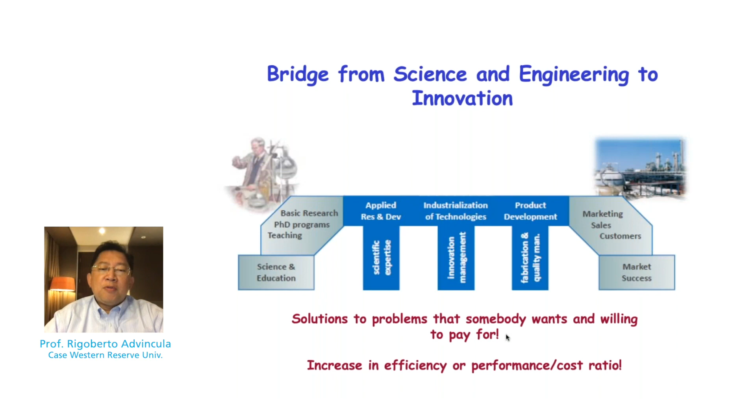On the other hand, we love to work with industry. A number of companies in the past have funded our work, including companies related to the oil and gas industries, oilfield service companies and proppant companies, which I will highlight today, the work we do with propping agents for hydraulic fracturing. In a way, what we do in a university is take the best of the basic platform of research we develop and translate it to the market. We do this with applied chemistry and applied materials, and working with companies, we're able to solve problems where we have a very good performance cost ratio. In other words, we do something that will improve efficiency or performance cost ratio, and of course, somebody will be willing to pay the cost.

Now, in the area of petroleum science and engineering, we started in 2014 PetroCase, which stands for Polymers for Energy and Transformative Research in Oil and Gas. We work on materials that can be very useful for extreme conditions: proppants for unconventional oil and gas, coatings that can withstand high temperature and high pressure, as well as nano additives for improving fluid behavior and flow in various fluids used for the upstream industry.

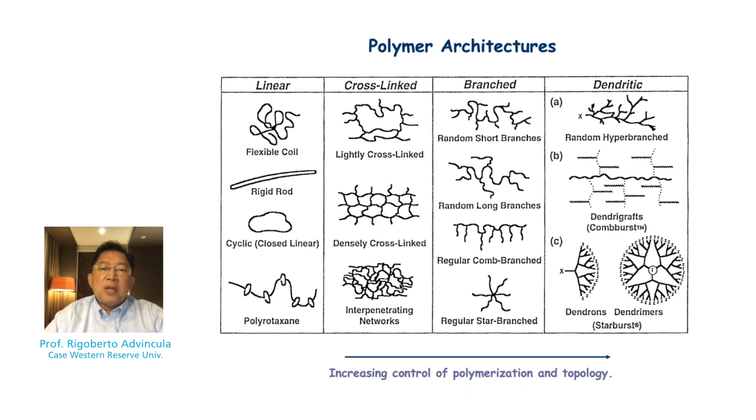So the way we do this is we work with polymers. Polymers are large molecules with different microstructures, from linear to cross-linked structures, to random, hyperbranched, and of course a lot of interest these days is in controlling their composition, microstructure, or their structure-property relationships. In a way, you want to use these polymers to control fluid behavior.

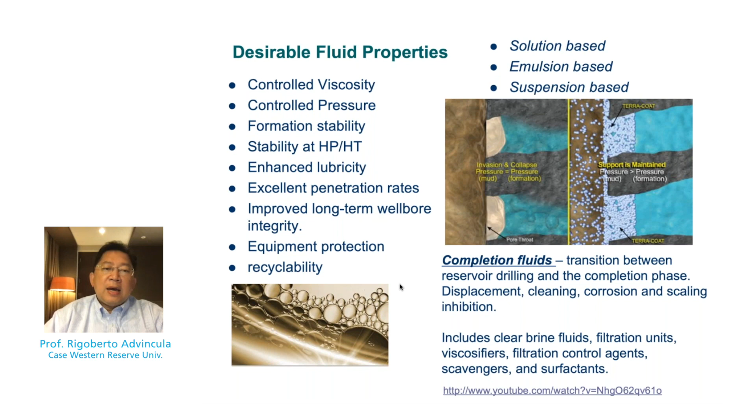Fluid behavior, whether it's solution, emulsion, or suspension based, means that polymers can control viscosity as an additive, and protect the formation as an additive for controlling degradation and acid stimulation. It can be used to stabilize the formation during matrix acidization type procedures. In the upstream industry, we work with drilling fluids, completion fluids, and workover fluids, which have importance in improving productivity and wellbore conditions or integrity.

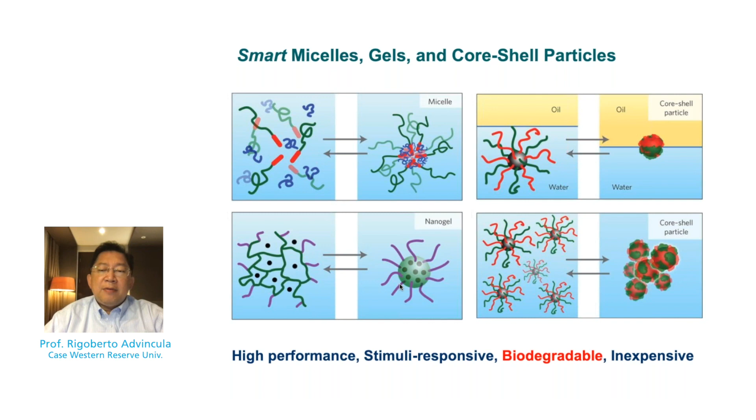Now, polymers are not only solubilized, they can be micellized or contribute to cross-linked gel formation. They're able to phase separate between the oil and water phase, or they can be involved in swelling and contraction based on controlled pressure and temperature. In other words, these are smart materials, able, based on the correct structure property relationship, to have applicable stimuli responsiveness that allows them to be used smartly for controlling fluid behavior.

Here I outline some of the more recent research work we do with the oil and gas industry, from working with viscoelastic surfactants and other well stimulation fluids, resin-coated proppants for hydraulic fracturing, which I'll emphasize today. We do 3D printing methods and projects, including nanocomposites, use of continuous flow polymerization methods to improve efficiency in polymerization of additives useful for the oil and gas industry, continuous and circulation testing under pressure and temperature. We do a lot of work on anti-corrosion coatings, emphasizing superhydrophobic coatings for oil and water separators. Lastly, we're interested in the application of nanomaterials like nanocellulose, graphene, and other nanostructuring methods for oil field chemical additives.

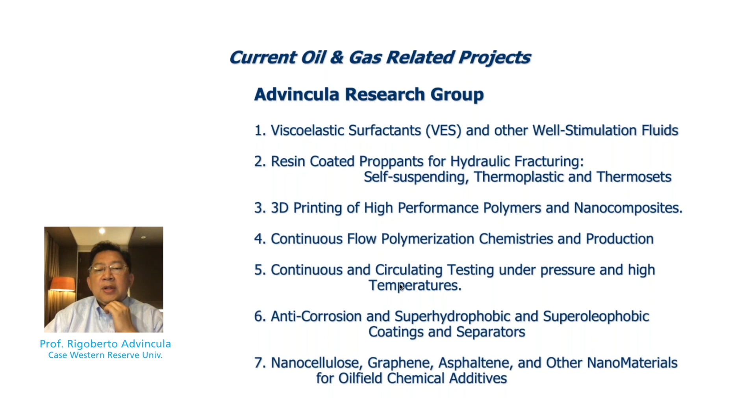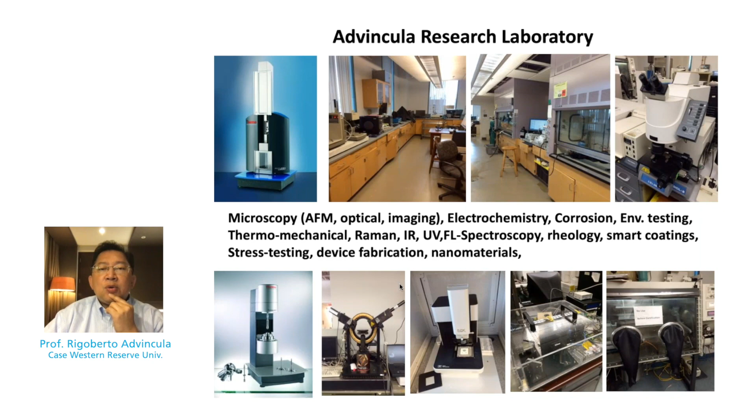Okay, here's a view of our laboratory. I just want you to see how it looks like. We are fully equipped for both synthesis and characterization. In particular, we're able to do a lot of surface analysis, including atomic force microscopy, which we do on coatings and also proppants. On the other hand, we're fully equipped for working with projects related to core flooding, pressurized flow, rheology of fluids, fluid loss measurements, and investigation of phenomena that could be related to downhole conditions.

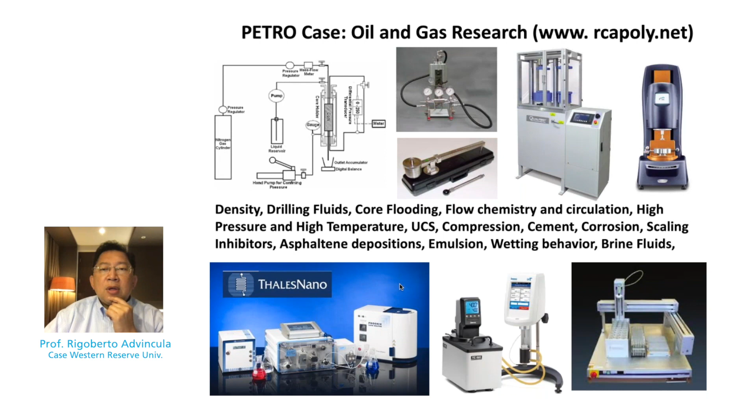In the oil and gas production and distribution, one deals with upstream all the way to downstream. There are demands or problems that can result in low efficiencies or low production. That is why the emphasis on low cost but high productivity or high efficiency is always an attractive option. In fact, with proppants, which we will talk more about today, there is a drive to understand the cost of using a lot of proppants versus using smarter proppants, even though at a higher cost, but can result in higher production efficiencies.

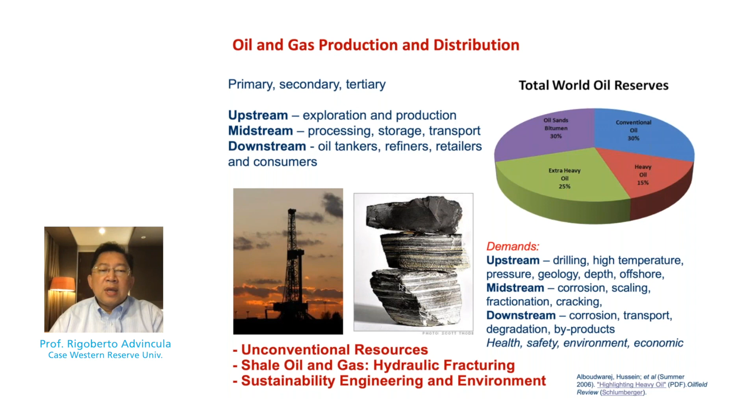Such is the case for shale oil and gas. This has been the key towards oil and energy independence here in North America, in the United States in particular. So science and technology is trying to keep up always with regards to improving efficiency and problem solving.

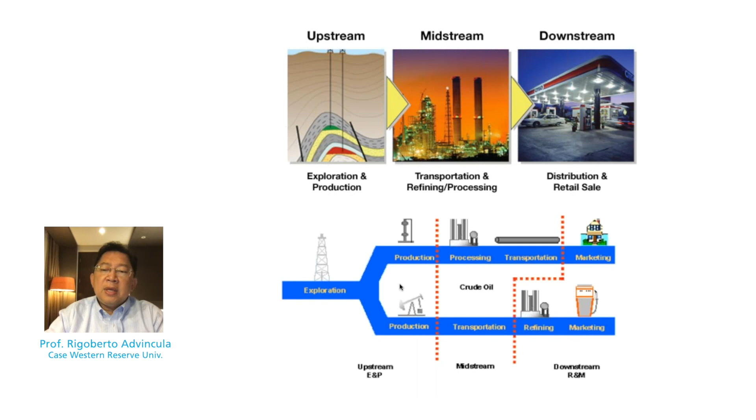Now, as you can see here, we can divide the petroleum industry into the upstream, midstream, and downstream. I apologize if this sounds simple for some of you who are experts there and who have been involved with the industry. I would like to use this as a segue also to address people who are very new to this field. Upstream regards oil exploration and production, which involves drilling and extraction. Midstream could be transportation and storage, all the way to the refining, and then of course downstream is refining all the way to the distribution. All this means that there are various supply chains and production demands that start all the way from the oil field, whether offshore or onshore.

Now, hydraulic fracturing is a game-changing technology that goes back, in fact, all the way 75 years ago. What it is, is that it allows you to extract unconventional oil and gas, or difficult to extract resources such as shale oil and gas, by employing high pressure pumping of various fluids, primarily aqueous fluids that has been viscosified with a polymer.

Now, a key ingredient to hydraulic fracturing is not only the additives, but the use of propping agents or proppants. This has largely been in the realm of sand or minerals, but in the past and even now, there's a lot of interest and uses of ceramics, bauxite, and other types of resources, including walnut shells and, of course, resin-coated sands, which emphasizes the work we are doing with polymer coatings for proppants.

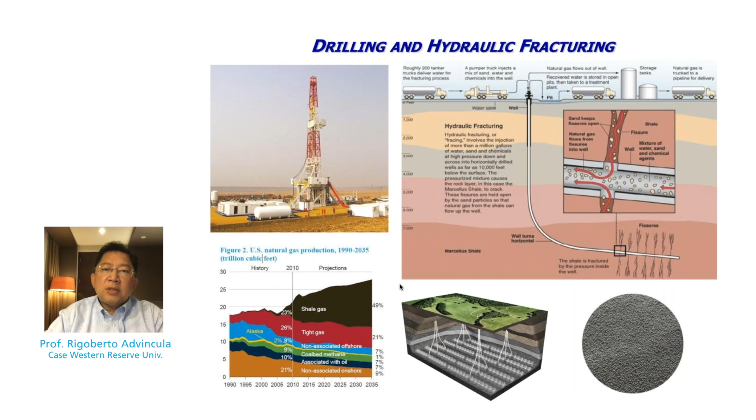So just to emphasize that whether you're dealing with subsea engineering, drilling, transport, storage, or refinery problems, it's always a catch-up game in that the energy or efficiency of energy extraction increases or improves as the technology catches up.

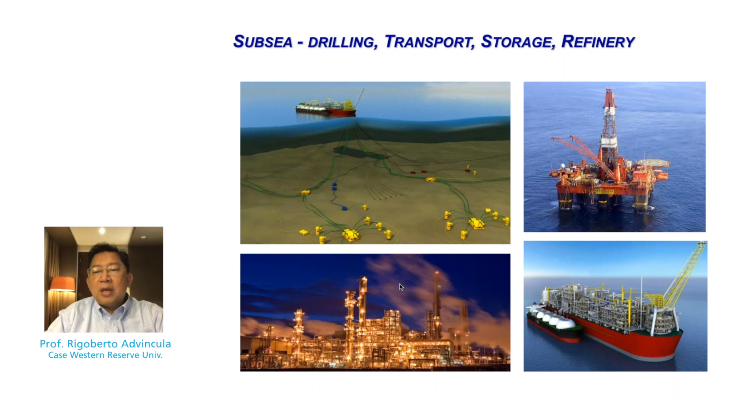In fact, 10 years ago, people were talking about peak oil, thinking we had extracted all the oil and gas we could ever do, or that tertiary recovery would be very difficult until a lot of efficiencies were solved or perfected, even in hydraulic fracturing, which brought the cost of doing such procedures to a profitable price.

Of course, the price of oil and gas fluctuates, and in leaner times, cutting costs or conserving cash has always been a game. But remember that in this game, which goes up and down, technology is always a prime mover in all stages, from upstream all the way to downstream of the petroleum industry.

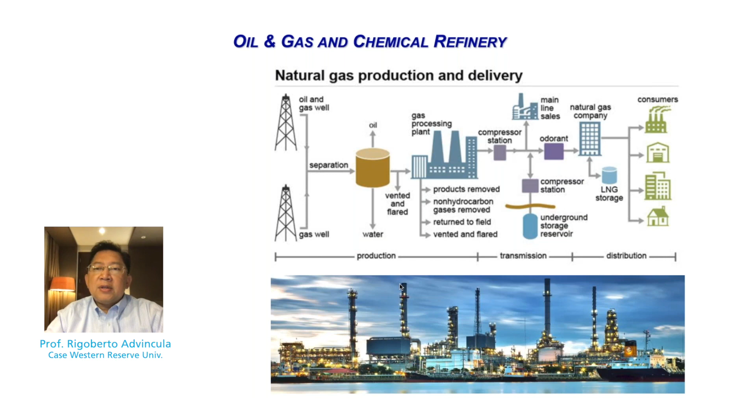So here is a simple chart showing how the oil and gas extracted from the field is separated into oil and produced water, and then goes to the gas processing plant, transported by pipes, and compressed. If it's transported as LNG, this is on the way to exporting, which is what the United States has become for the last 5 years. We are a net exporter of natural gas throughout the world.

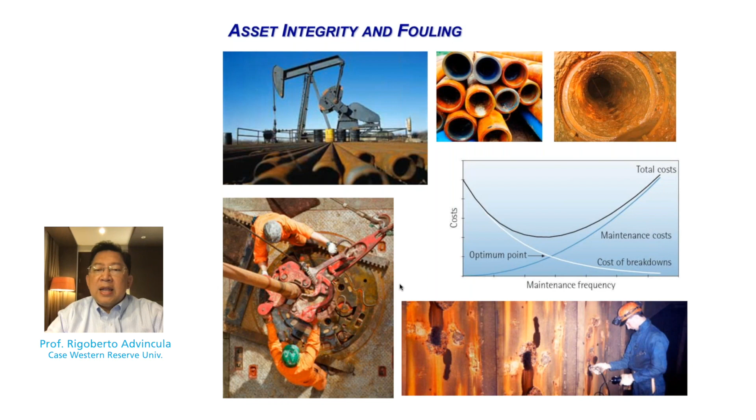And then, of course, one has to deal with fouling problems, which is present in a lot of extraction industries. That means that whatever we pump or use in all these pipes, whether the casings or the pipes that transport oil from the production field all the way to the refinery, there's always caution to add anti-scaling or anti-corrosion agents, or even use better alloys to prevent fouling.

And then lastly, catastrophic failure is something that the oil and gas industry is very careful to avoid and mitigate, at least by using the best practices in the industry.

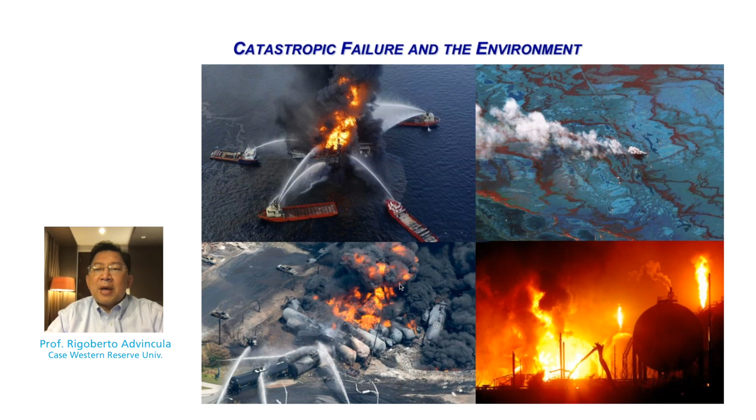So I hope this introduction has put a perspective on our interest in proppants and hydraulic fracturing. Before I focus more on proppants, a good introduction on hydraulic fracturing is needed.

In hydraulic fracturing, a fluid based on water, oil, or emulsion is pumped towards the formation, which we typically call tight, a shale formation with oil and gas resources. Together with directional or horizontal drilling, this has allowed the efficient placement of tubulars or annulars such that the formation, which has very high pay zones, can be reached by hydraulic fracturing. Typically, we're looking at about 10,000 to 20,000 feet.

Pressures are about the same, about 10,000 psi. Therefore, anything you pump means you have to pressurize or viscosify the fluid such that you can force the opening or fracturing of the shale and then eventually employ proppants.

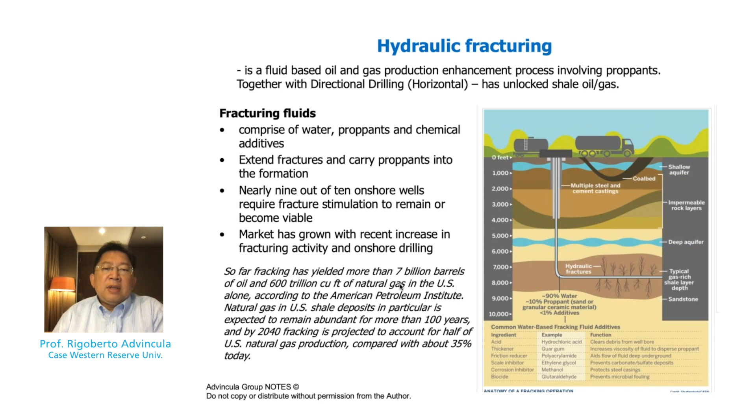Most fracturing fluids comprise water, chemical additives, and suspended proppants. The extended fractures are essentially opened or kept open by the deposition of proppants that are pumped together with the hydraulic fluid. A lot of these stimulation procedures are used to improve production efficiency. In other words, without this stimulation or completion procedure, these wells are unproductive. This means careful planning is needed to match the production cost with the improvement from the fracturing procedure.

As you can see here, the hydraulic fracturing fluid is basically a carrier that pumps the proppant as far as possible into the fracture. The fracture, which can be prepared by a perforating or isolated perforating method, is cracked or fractured open such that the fluid containing the proppant is dispersed as far as possible in the formation or fracture, so the proppant remains on that fracture and keeps it open. In a way, a proppant really is a tool that is employed during this procedure.

Now, a good question is, if this is a tool that remains on the fracture, shouldn't we be emphasizing the efficiency of the tool, or the proppant, to enable higher production? This is probably a good question to ask. Why is it that most hydraulic fracturing procedures have shorter lifetimes? In other words, within 1 to 2 or even 3 years, there's a high drop-off in production with most hydraulic fracturing procedures.

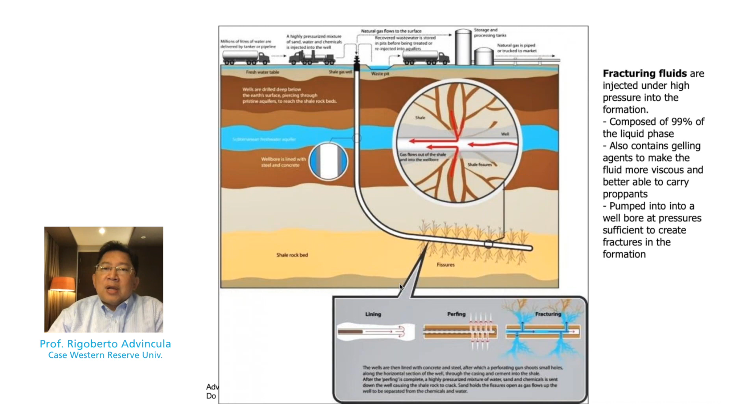A hydraulic fracturing fluid is mainly water in this case, although other emulsions or gases can be used. As a hydraulic fracturing fluid, it contains many things, including gelling agents, surfactants, cross-linkers, breakers, inhibitors, biocides, and so on. So it's a formulated fluid, and together with the viscosifier, one is able to carry the proppant together with this fluid onto the formation.

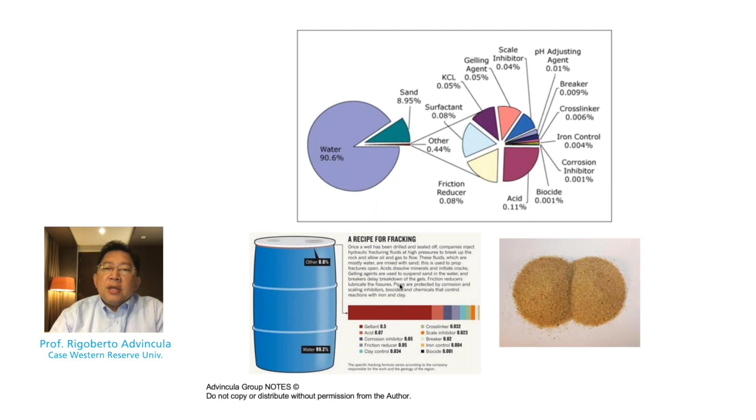A good fracturing fluid should be able to withstand various temperatures, pumping rates, or shear rates. Most commercial fracturing fluids are aqueous based, and they are jellified or even foamed. A typical jellifying or viscosifying agent is based on a polymer.

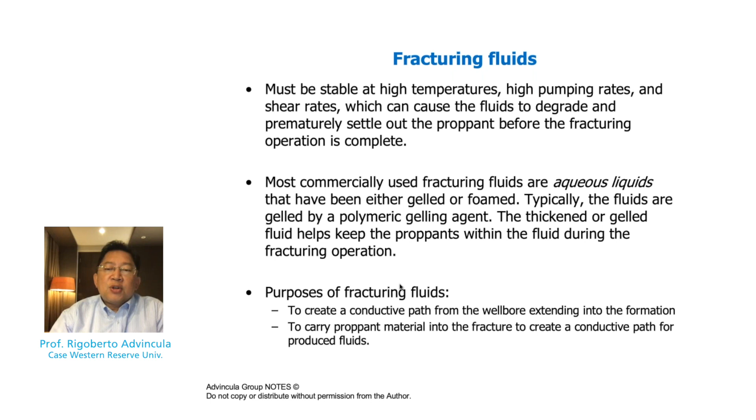In the past, there was a lot of use or interest in guar and xanthan gum. However, these days, people rely more on polymers like polyacrylamide to viscosify the fracturing fluid. The purpose of the fracturing fluid is to create a conductive path from the wellbore extending into the formation, and secondly, to carry the proppant material into the fracture to create a conductive path for the produced fluids to be extracted.

This table summarizes several types of base fluids that are used for fracturing: alcohol based, acid based, emulsion based, or even oil and gas based.

A typical water-based formulation contains slick water, fluids containing cross-linkers, as well as viscosified water, which could be synthetic or natural polymers such as guar, as I mentioned, that can improve the viscosity. Other types of fluids, from foam to oil-based, have various functions and composition.

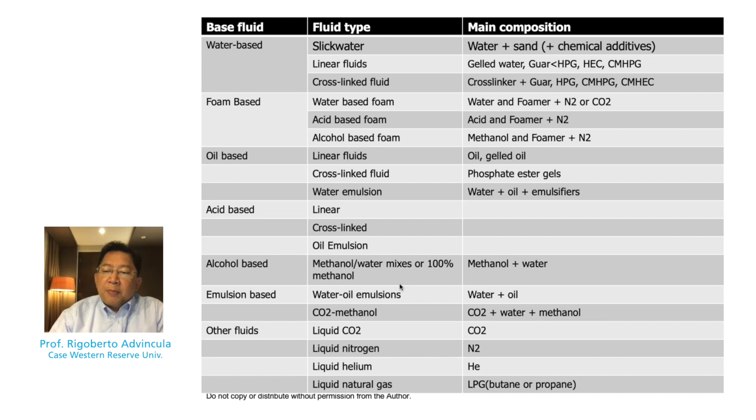Time will not allow me to focus on those other fluids because, as promised in this note, I'm going to emphasize more on proppants. Lastly, I'm going to review the stages in fracturing.

The first stage is injecting a prepad with a low viscosity fluid used to condition the formation, which can contain fluid loss additives, surfactants, and prevent formation damage.

The second stage involves the generation of fracture in the shale formation, or in other words, a viscous fluid is injected without proppants. The purpose of this is just to create fractures as efficiently as possible.

The third stage is when you introduce the proppant with the viscosified fluid. The main goal of the proppant is to keep the fracture open or propped up, which is why it's called proppant, short for propping agent. This means the ability to control the density of the proppant together with the fluid, and to disperse it with the carrier fluid as far as possible, is a very important objective.

After you've done that, you'd expect a certain flow back, which means you need to clean up the formation. This is usually done with flush fluids, and eventually the fluid viscosity should diminish or slow down. These decreasing levels of viscosity are meant to clean up the well, but leave the proppant in place.

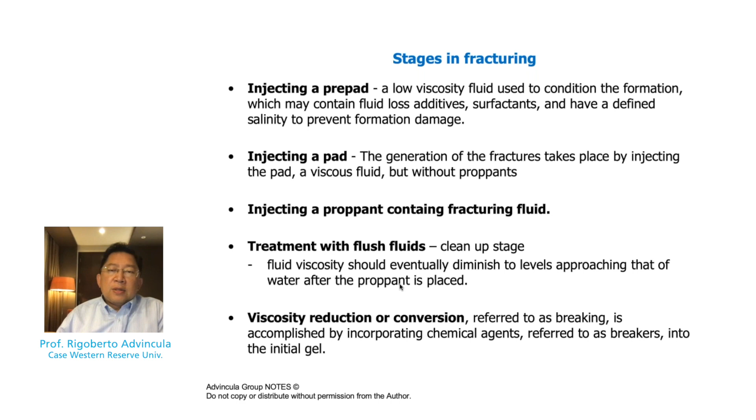So having outlined and given all this introduction, let's talk about proppants. As I mentioned, proppants are propping agents. These are particles that are suspended within the fracturing fluid, or hydraulic fracturing fluid.

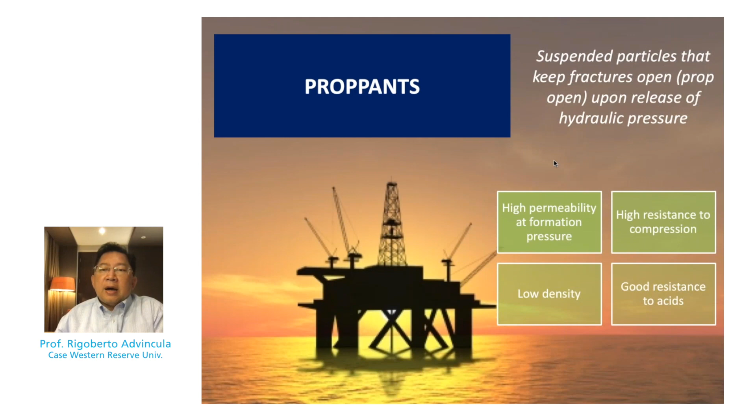In terms of materials, there are several choices, and I'm just going to name them. The most dominant is sand, followed by resin-coated sand, then ceramics are used, followed by bauxite, and then high-strength bauxite. By the way, bauxite is a derivative from the aluminum refining industry, or it's an aluminum oxide composition.

Ceramics or resin coated sands are more conformal. They have medium to increased strength. And the ceramics or even the bauxites are more regular in their geometry as synthetic particles. They can be highly valuable in terms of strength, resistance against closure stress, and changes in density or compressibility.

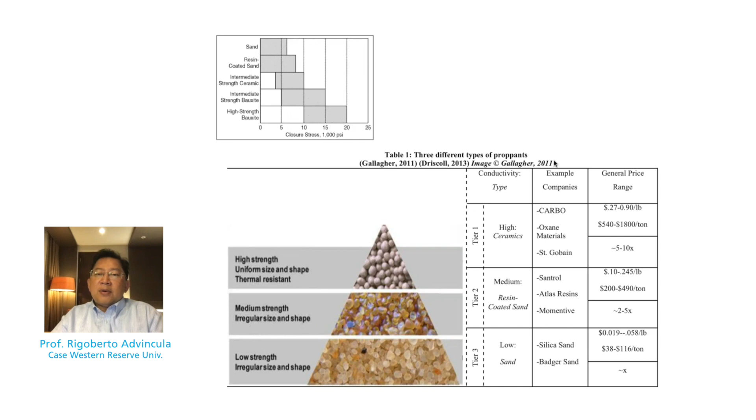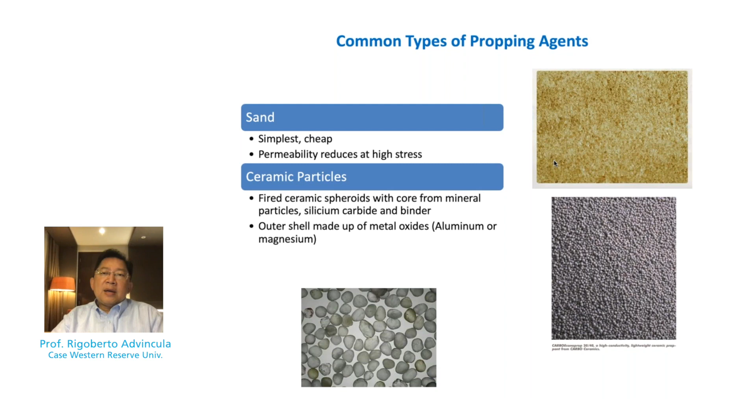Outer shell materials based on aluminum or magnesium have been used. Even walnut shell has been used - that's an irregular geometry versus spherical geometry. All have been proven useful at certain types of projects or stages. For example, sand is commonly used when you have shallower wells or lower pressures. On the other hand, ceramics has been reliably used for more demanding higher pressures and deeper zones.

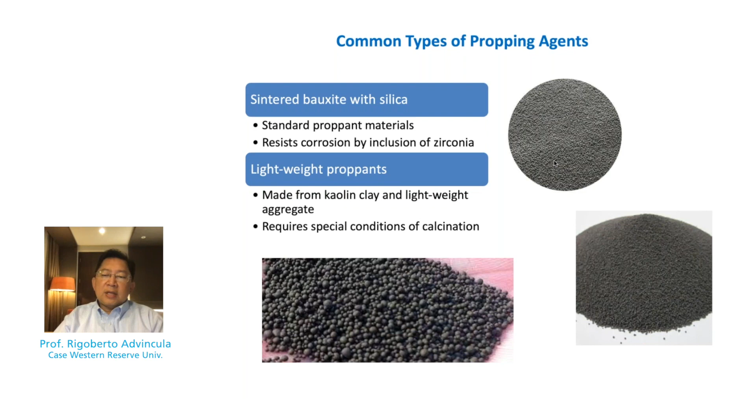Sintered bauxite is actually a synthetic material. It has a lot of advantages in terms of size and resistance against compressibility. However, again, the economics does not dictate that this is used very commonly in massive amounts in wells. Other types of proppants that have been reported include lightweight proppants, such as those with hollow shells or calcined or kaolin clay containing aggregates, and a number of these have been reported in literature and talks. Other unconventional types of proppants include fibers, filters, and resin-coated proppants, as I'll emphasize soon.

This has been very useful in that the main idea, as I said, is to prevent closure stresses in the fracture and keep it open as much as possible.

Now, emphasizing resin-coated proppants, the game-changing part there is the polymer coating used to coat the proppants. In other words, we can take sand and coat it with phenolic resins, Novolac type resins. By the way, phenol formaldehyde or phenolic resin is the most common type of thermoset resin coating on proppants. So the idea is to improve the crush resistance of these proppants by armorizing them with a thermoset shell of polymer.

However, proppants prepared in the manner of thermosets can also be coated with other types of polymers. Remember, the word polymer is a bigger term than thermoset. Polymers can encompass thermoplastics, elastomers, other types of thermosets, or combinations of thermosets and elastomers. So the key word here is really polymer-coated proppants, which could mean coating with a thermoset, a hydrogel polymer, or even a thermoplastic polymer. Each can have possible advantages under real downhole conditions.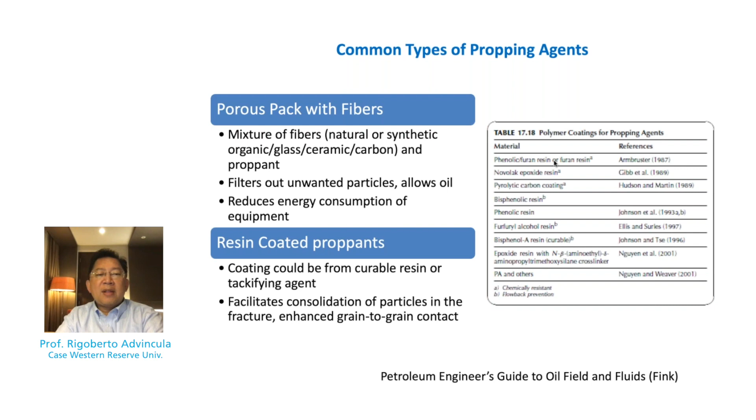Okay, so here I'm showing you several chemistry options for proppants. The most common is based on phenol formaldehyde resin chemistry, as shown. This is basically the reaction of a phenol and a formaldehyde, very old chemistry, in fact more than 150 years old. Bakelite comes to mind, the word Novolak resin comes to mind. These are basically cooked or mixed together with sand, then finally coated with a uniform thickness, giving the sand a higher crush resistance.

Now, that is not the only type of resin coating available. Epoxy coating is also a well-known product. Epoxy comes from the reaction of epichlorohydrin and bisphenol A, but there are many choices for epoxy or epoxy phenol formaldehyde combinations. Epoxy refers to the group that reacts together with the hardening agent or alcohol to produce a coating. Other companies have reported polyurethane, which is based on the chemistry of diisocyanate and polyol, allowing you to get a thermoset resin material based on the number of cross-linkers, or polyurethane as a thermoplastic can be employed.

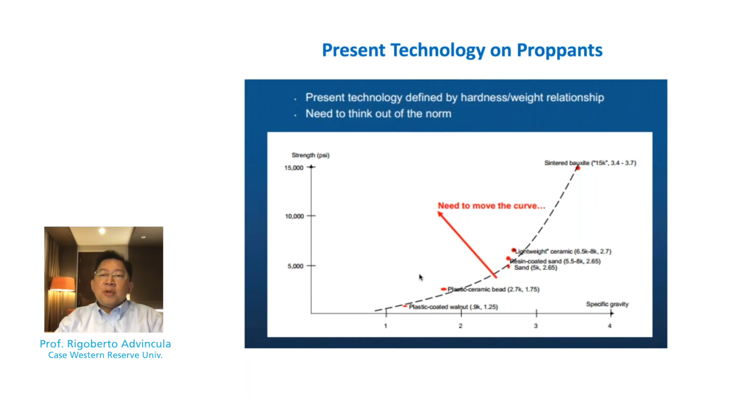In other words, the proppant should be suspended and kept suspended until it reaches the fracture, so that it can be distributed more equitably on the fracture and therefore maintain its opening.

Proppant size ideally ranges from 12 to 20 mesh particles. Some have looked at 40 to 60 mesh. The higher the mesh size, the smaller the particle.

Proppant strength refers to the crush resistance or ability to withstand closure stresses and therefore maintain the opening.

Proppant grain shape - a well-rounded proppant is believed by some to be ideal, although as mentioned, walnut shell and other particle geometries have also been used.

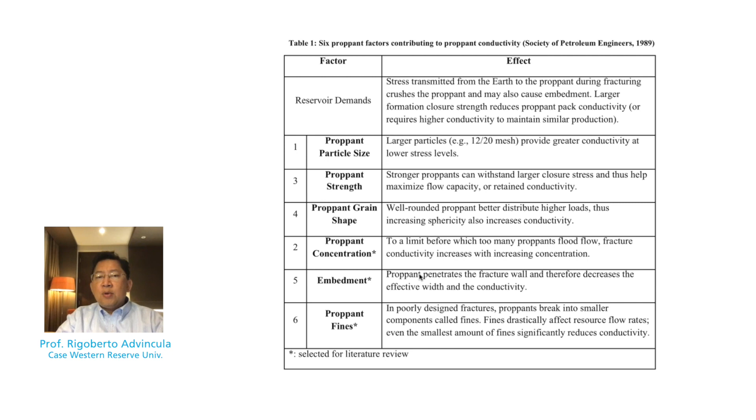Lastly, proppants are broken into smaller pieces, called fines. The fines generated are much smaller particle sizes, and they can block the flow in fractures on productive zones. So all of these are factors that may contribute eventually to low productivity in a well.

Here I have summarized some things that can be done.

Proppant can have anti-settling additives to keep it suspended. Proppant can have protection against flowback, or simply making the proppant stay longer or even adhere to the formation. Some concepts here could be the use of thermoplastics, adhesive coatings on proppants, or even magnetization.

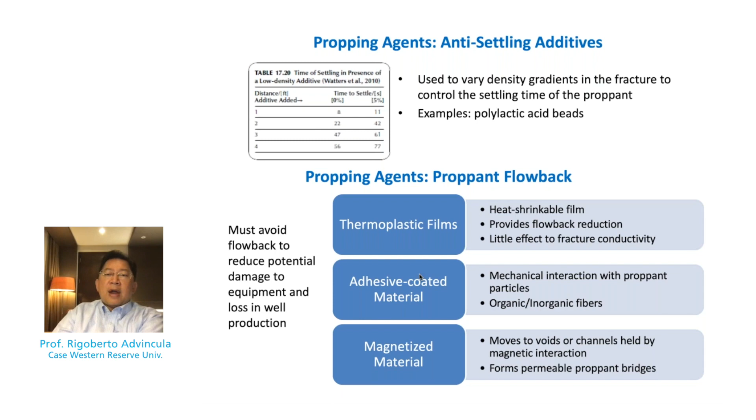Flowback is a problem - it means the proppant did not properly lodge in the fracture, and during flowback there could be enough pressure or flow to remove the proppants back towards the fluid being pumped out, therefore failing to lodge it in the fracture of the pay zones.

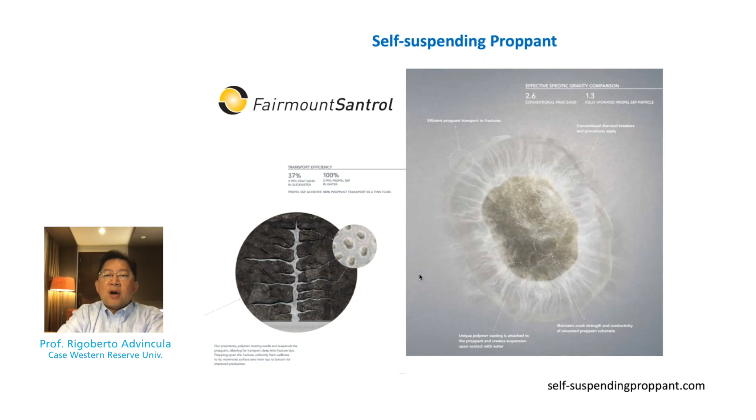One particular proppant regarded as quite important for matching the specific gravity of the frac fluid is a self-suspending proppant from Fairmount Santrol. In this case, a gel, a hydrogel, or actually a polyelectrolyte complex surrounds the proppant, and therefore it is able to float. It's able to disperse more homogeneously in the frac fluid, and therefore stays longer and ends up in the fracture zone. One can see in this simple demonstration that typical sand will simply settle at the bottom.

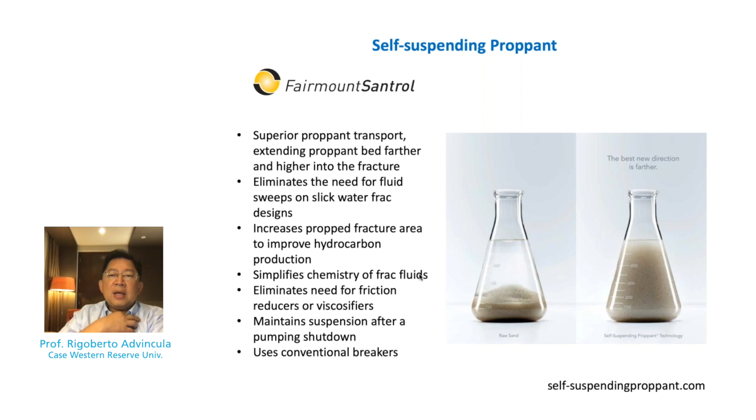But if the same sand is coated with a gel, or basically a shell that swells with water, it floats. It basically viscosifies the fluid too. In other words, one possibility is the need for less friction reducers and viscosifier in the frac fluid, because the viscosifying media actually surrounds the particle or sand itself.

Now, this self-suspending proppant has been patented. It's a commercial product by Fairmount Santrol, and the chemistry involves a hydrogel coating on the proppant. The hydrogel can be made up of different monomers capable of hydrogen bonding in various aqueous media or slick water conditions. This hydrogel is also compatible with other types of viscosifying media.

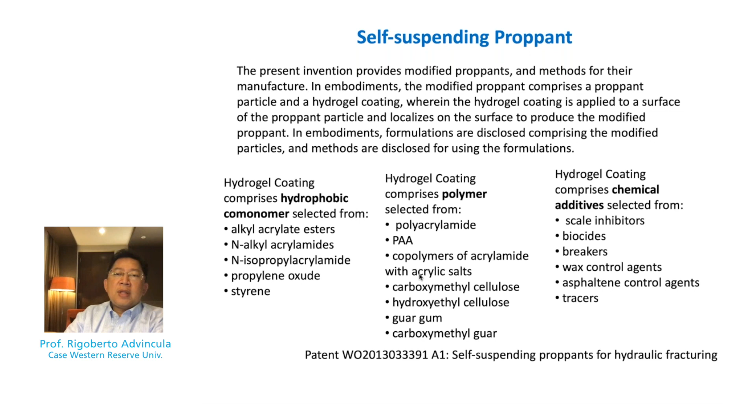Together with the additives, the patent looks at various compositions able to have the hydrogel component stabilized together with the suspending proppant. Anybody can look at this patent, but in analyzing it, they probably end up using polyelectrolytes - some cationic polymers - together with several viscosifying media.

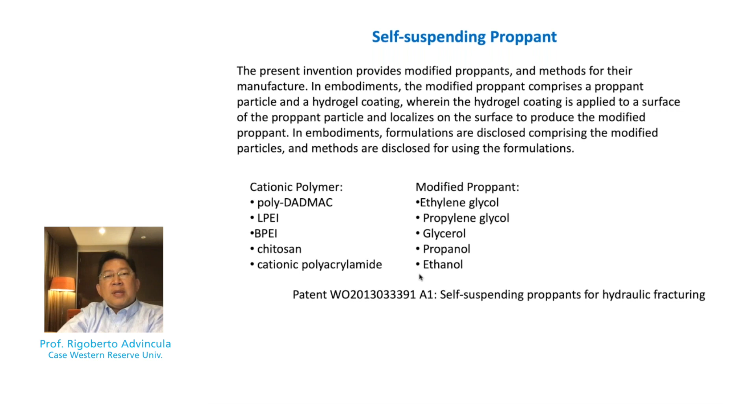So this composition together with the hydrogel essentially swells the shell or the polymer shell around the particle. This would have involved some coating process where the hydrogel is fixated on the particle, and therefore when resuspended in water, they're able to float and viscosify. In other words, the swelling of the gel basically lowers the overall specific gravity of the particle itself.

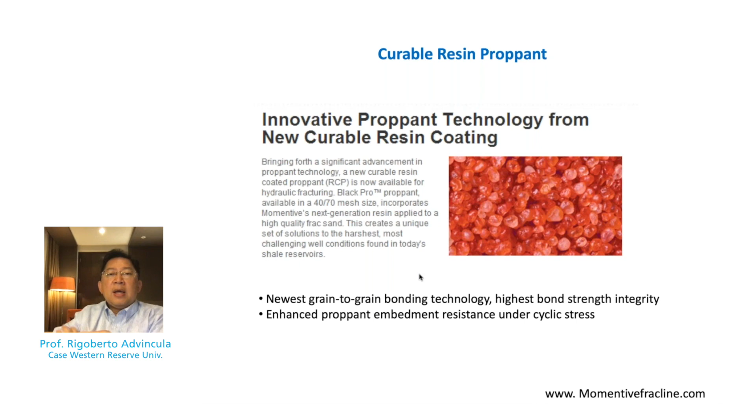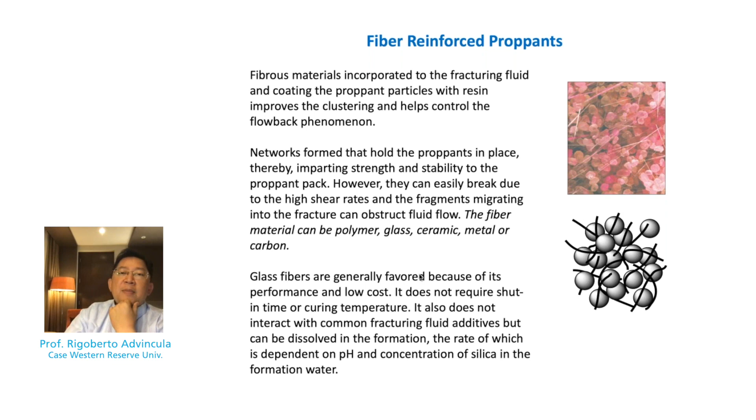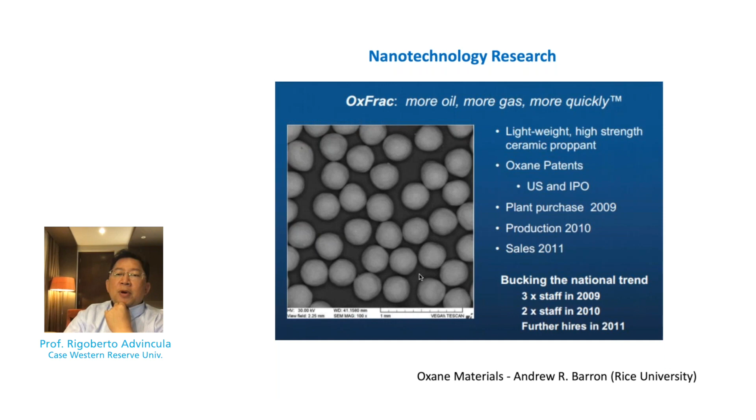Now, going on to other types of proppant technologies, from curable resin coatings to the incorporation of nanocellulose, many things have been reported, including fiber reinforcement for proppants. Some have reported even biodegradable proppants to this effect, and some have reported hollow shell ceramic proppants.

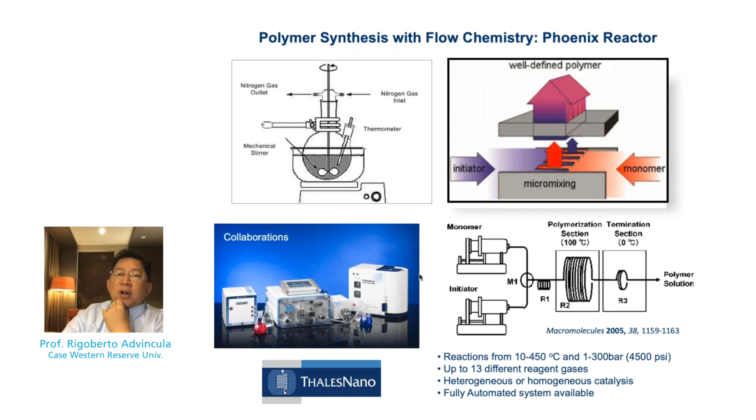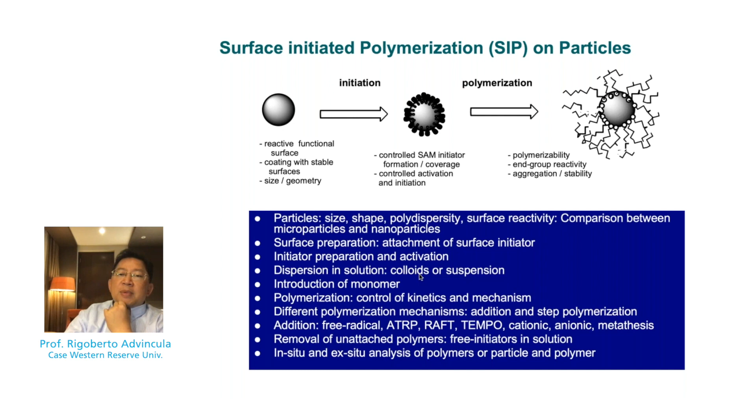So, in the interest of time, I'm just going to go quickly and describe what we've been doing. We have been working on coating particles with polymers using flow chemistry or batch processes. Basically, a particle can be coated with a polymer using surface-initiated polymerization, meaning the polymer itself can be grown on the particle during polymerization.

We have demonstrated this using a flow chemistry setup where we pack the column with particles, and then we introduce the monomer, with the initiator previously grafted on the particles, as shown here. For example, to coat the silica particles with a hydrogel based on

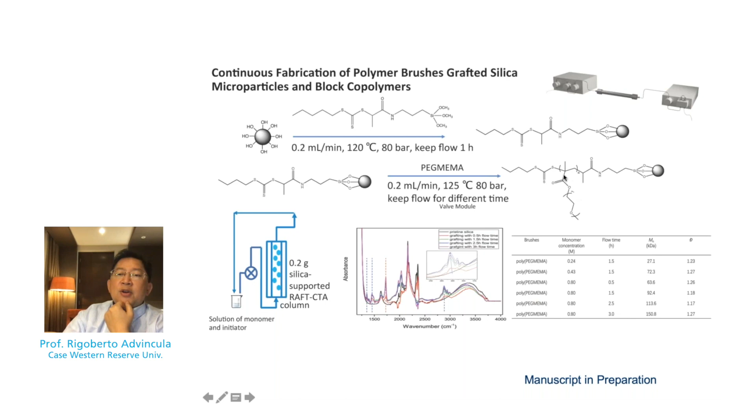PEG methacrylate, using both homopolymer and block copolymer strategies. So here we coated the particle with polyethylene glycol methacrylate followed by polyNIPAM, or N-isopropyl acrylamide, which resulted in a hydrogel coating itself. We are actually able to test the permeability of fluids on these particles, measuring the differential pressure or temperature

under higher pressure and higher temperature conditions. In other words, this could be a core flooding experiment that can be done in the lab.

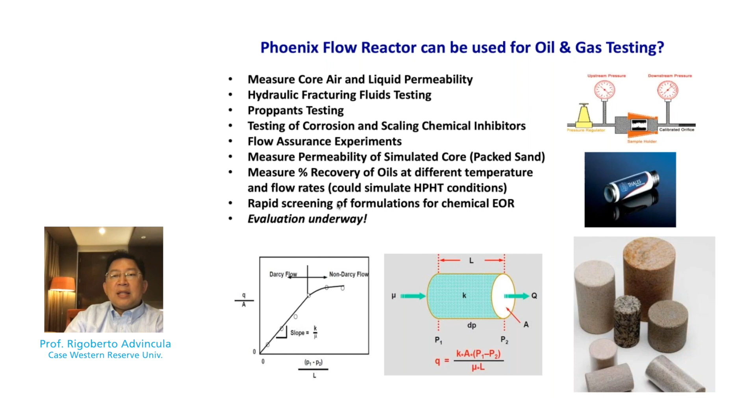So let me close by pointing out that one of the compositions we have done is based on the use of polybenzoxazine. Now, polybenzoxazine chemistry is a thermoset chemistry with a higher temperature rating.

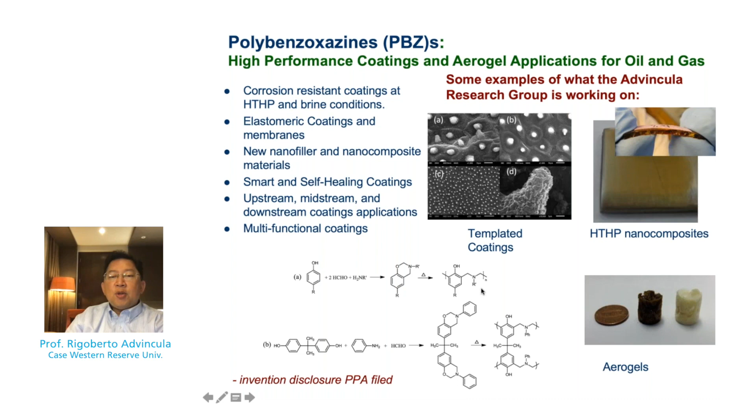We've actually used it for coatings that can be used for oil and water separation or the formation of aerogels. As can be seen here, the benzoxazine ring is simply opened up by heating to produce a thermoset with a high degree of cross-linking. Now, skipping this curve, let me just focus on how we have proven this concept.

The polybenzoxazine can be coated directly on the particle. Once it has been coated and heated, you basically form a very hard shell.

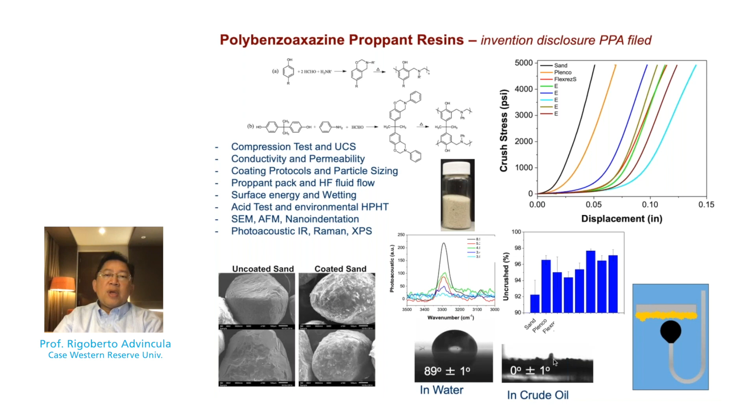And we have tested the performance of this proppant coated with polybenzoxazine using crush stress measurements and also unconfined compressive strength measurements, and investigated their wetting properties using contact angle measurements, as well as measured the thickness using photoacoustic IR. We have shown that these proppants and resins have quite a high crush resistance.

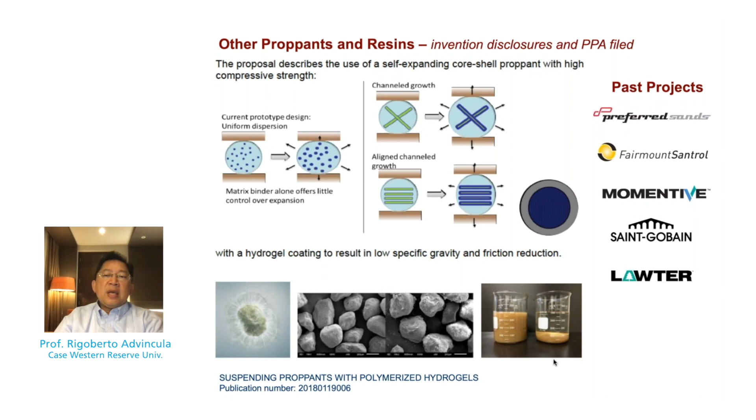So the goal now is to coat these proppants with a hydrogel, for which we have also filed a provisional patent. The hydrogel, together with the high strength of the polybenzoxazine coating, for example, will produce a superior proppant, which combines both low specific gravity and high compressive strength resistance.

And then finally, we've done a number of measurements to look at the viscosity, shear rate dependence, proppant pack behavior, and crude oil displacement, even with this type of particle, using unidirectional pressure-driven flow measurements.

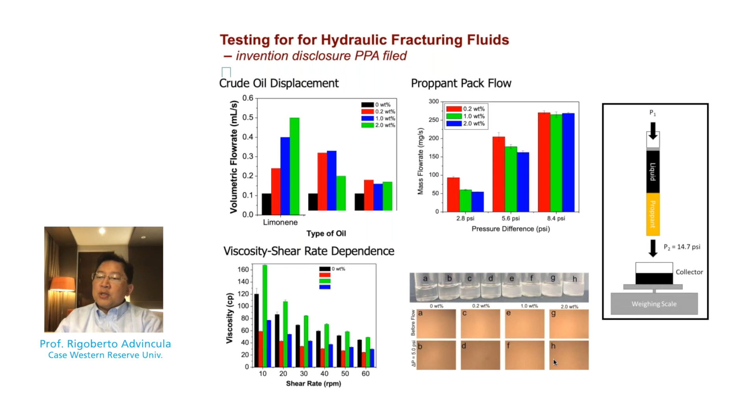Now, let me close by saying that atomic force microscopy is actually a very important tool for characterizing such resin-coated sands. We have some data, but I'd like to use data that was recently published in 2017 by the Barron Group. What they did is fix carbon nanotubes using cross-linkers, modifying the surface of the proppant, the ceramic proppant, such that the carbon nanotube can be incorporated on the surface.

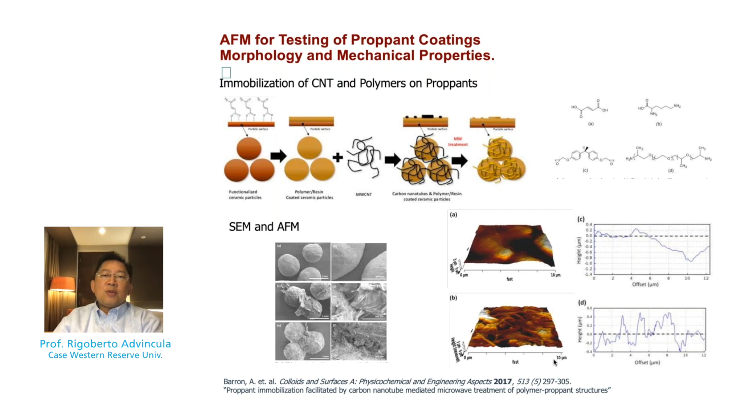This was investigated by both SEM and AFM, confirming the morphology changes as the carbon nanotubes are grafted on the surface. So with that, I've given you a lot of information, and I hope you find this useful. I would like to thank you and be happy to answer any questions that you have.